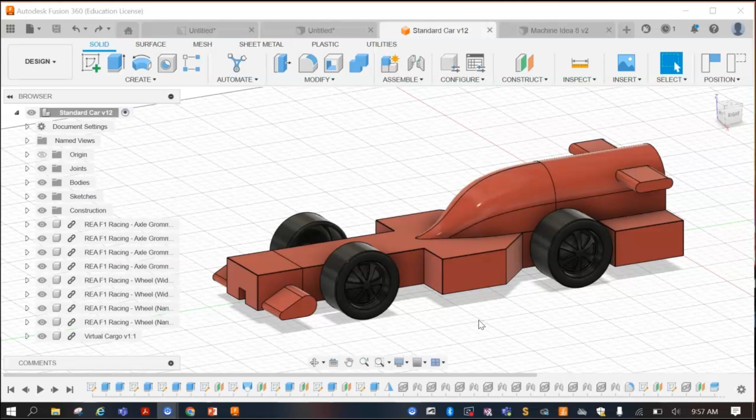So over here in the inspect area, I'm going to click on here. Alright, and you've got all these different tools that you can use. We've already looked at a couple of them, but there are a couple here that I think could be useful for looking at the shape of your model and analyzing that.

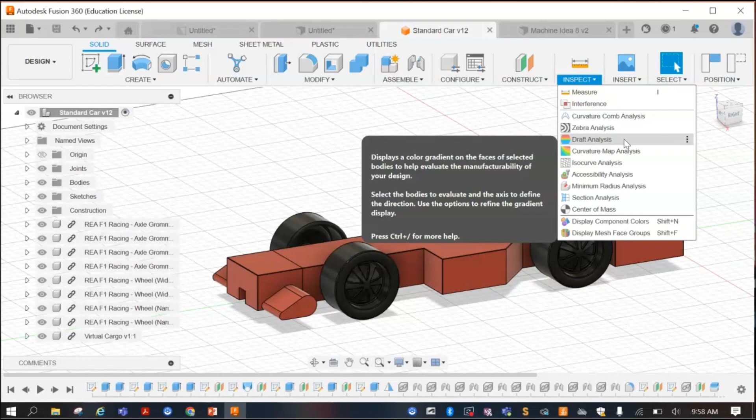So the first one we'll look at is the curvature map analysis. When you hover over these, it gives you a brief overview of what that does. For this one, it's analyzing areas of high and low surface curvature.

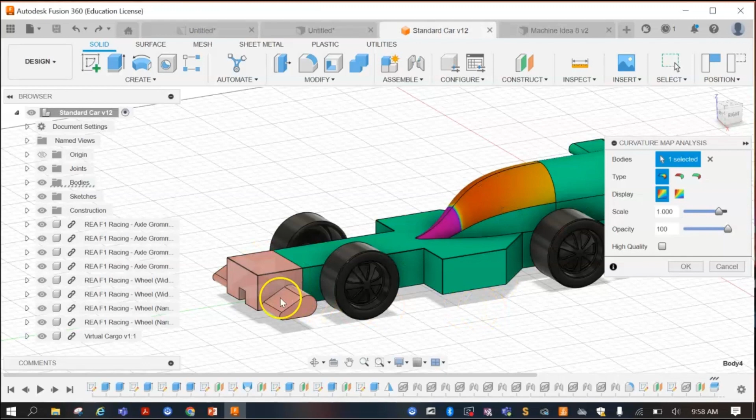So when we click on this, and click on the body, I'll click on the front as well. Okay, so now it's telling us where it's purple, that's where there's high curvature. You can obviously tell in that section there.

Now, as we know with an F1 car, when we're looking at aerodynamics, the steeper the curve, the more drag you're going to have, and this here will probably cause you a bit of downforce.

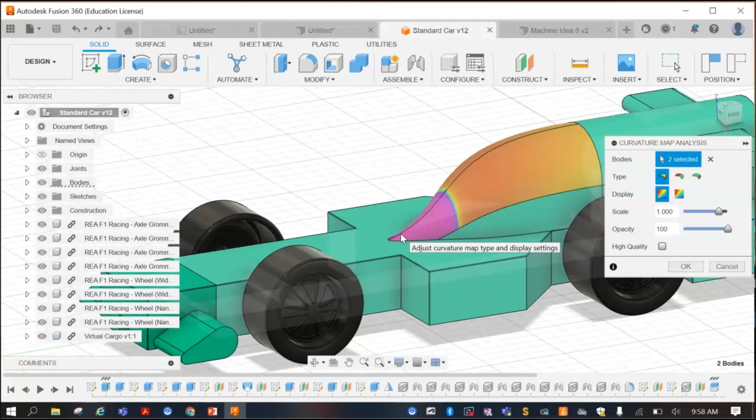Okay, so you probably want to use this tool and work out, well, maybe that curve is a bit too steep, maybe we can look at changing it. So yeah, I think it could be useful for those kinds of things. Alright, I'm just going to press OK. And then if I go to my other model...

Alright, so this is what we were working on before. I'll do the same thing here. So, inspect, and we'll go to this one, click on the body.

Alright, so when you've got more intricate curves and stuff like this, it's going to be more useful for you. So you can now see that the ones in purple obviously have the high amounts of curvature. For aerodynamics, it's probably good to have a look at these kinds of things, especially when you're doing these sort of intricate shapes, as you can see here.

Okay, now, yeah, it really depends on what you want to use it for.

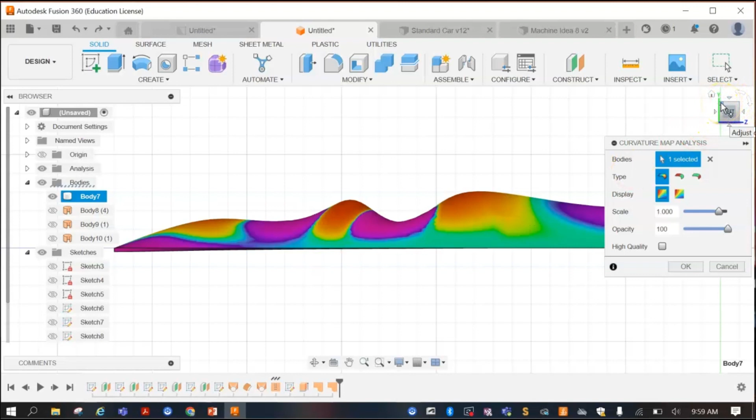I would be taking screenshots of this and doing like a before and after analysis of it, and go, okay, well, we identified that this steep curvature in here could be a little bit flatter to reduce turbulent flow in this section here, and to reduce downforce and whatever.

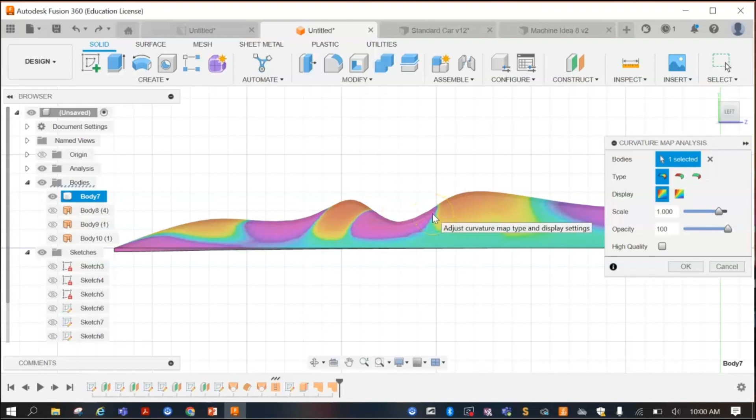So you could show, here's a screenshot from maybe this sort of angle, and then you can show another screenshot and show how you've improved that. So I do see some value in this tool, but if we just go cancel for now...

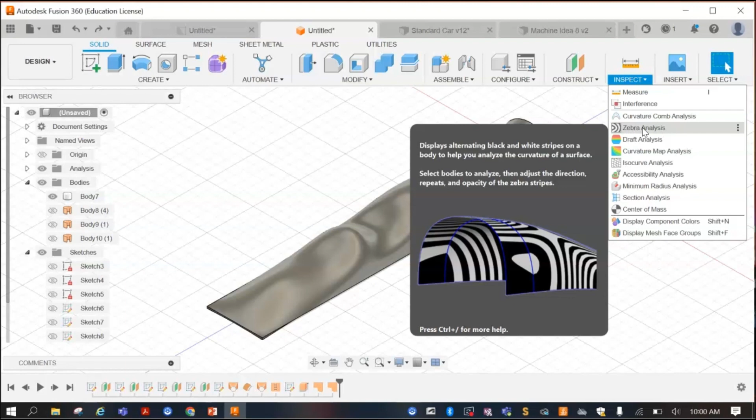Alright, another tool that we can look at is the zebra analysis. So it says here, let's go back, it displays alternating black and white stripes on a body to help you analyze the curvature of a surface. So it's doing something relatively similar.

Okay, but you can see obviously where I've got those little bumps, you can see those lines change. So when I move around, you can sort of see, especially from like a top view as well, how that changes.

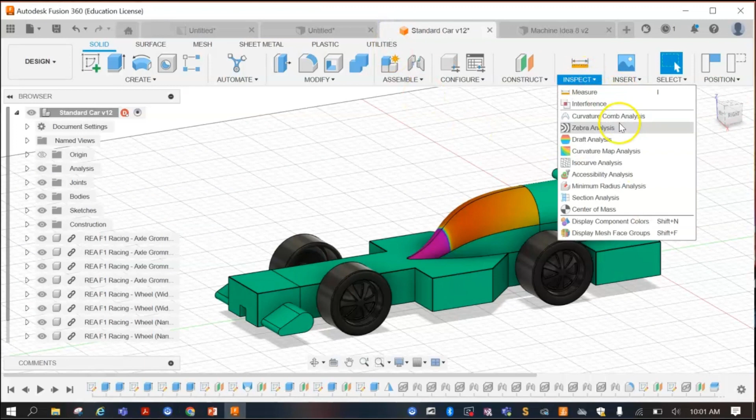Now, when you look at your standard car body like this, and we'll do the same, press OK, you can start to see where some of those different surfaces sort of meet.

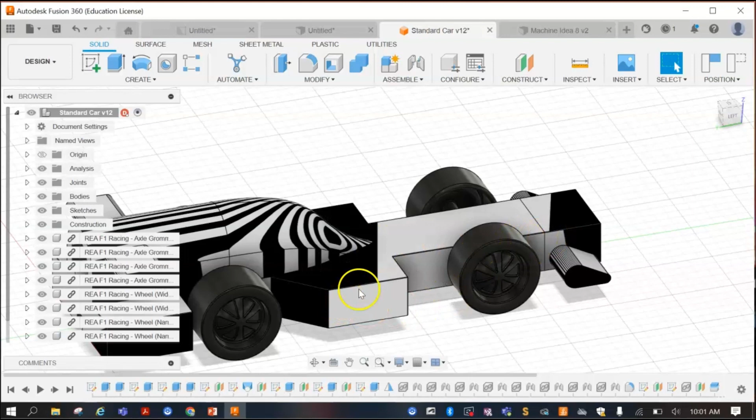Okay, so for example, the nose cone is completely different to just a standard body here. So if you wanted this to be a more continuous sort of shape, obviously doing it the way that we've done it, just with simple extrusions, probably isn't your best bet. You probably want to go and do similar to what we did here, where you've got continuous faces all the way around your car body. Because aerodynamically it's going to be a lot smoother since all these edges are molded into each other, not just random blocks hanging off the side of your car.

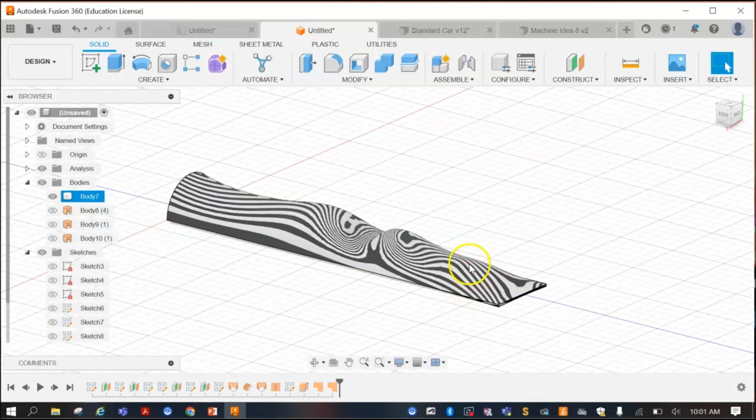So you could use the zebra analysis to go ahead and look at certain parts of your car. So there's those options. I just cut the video, and what I've done is I've just restored my car back to its normal state. I just went undo a couple of times to get it back to there.

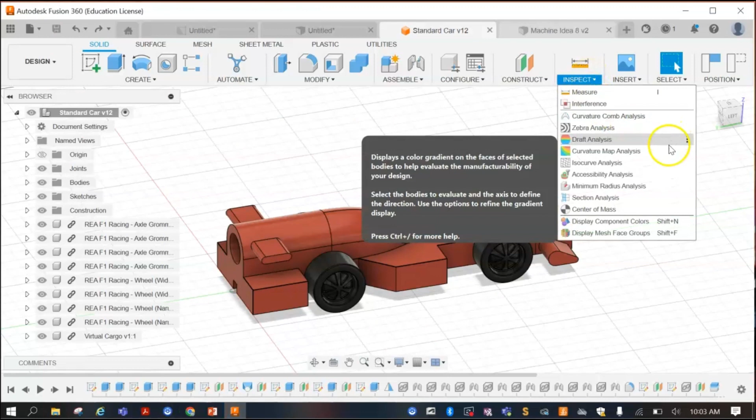But what I was going to show you is in inspect here. The other ones I'd probably be interested in would be the accessibility analysis. Especially for machining, you can start to work out what areas you can actually access. So that could come in handy.

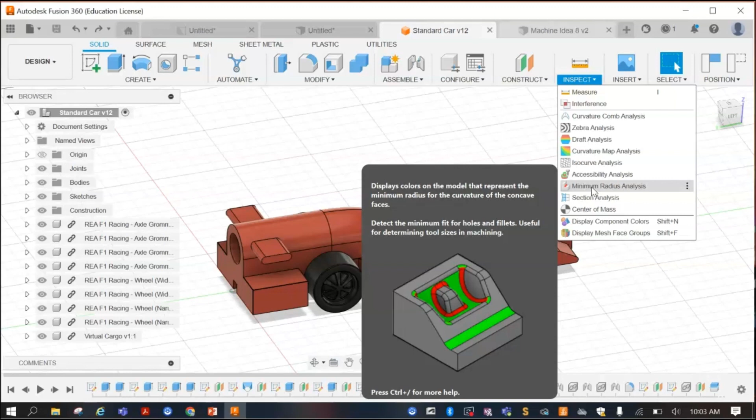But then also this one here, the minimum radius analysis. We know that we need to have at least a 3 mil radius because we're going to be using a 6 mil ball nose cutter. So you could go through and use something like this. Select your model, and say the minimum radius that you're going to need would be 3 mil. Then you can start to work out where we need to fix up some parts of our car. So stuff like that could come in handy.

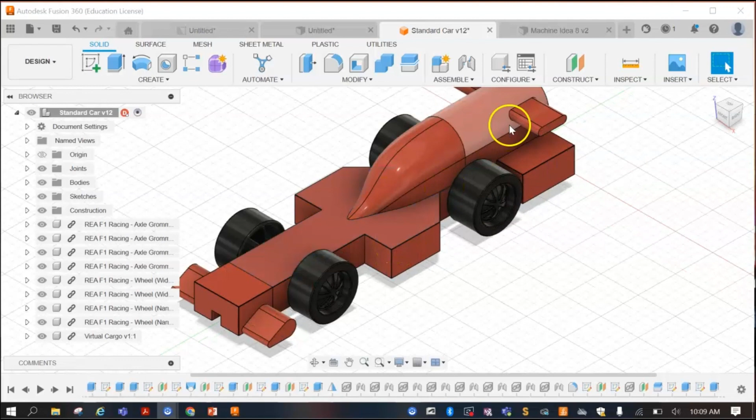So I just want to show you an example of what the minimum radius analysis actually looks like. Let's say for example on this surface here, for some reason, you wanted a 1 mil hole. I'll finish that sketch and I'll just extrude that, so let's say I want to extrude a little hole in there like that.

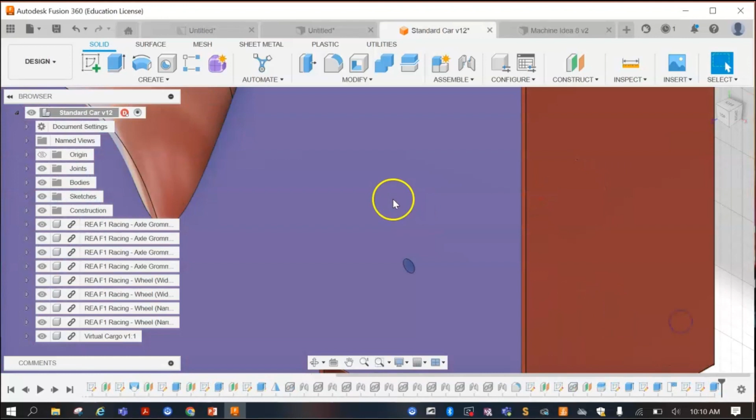So what this analysis will do is it will show us that if we want a minimum of at least 3 millimeters, it will show us if there's any issues with the car that you'll need to fix before you put it in the machine.

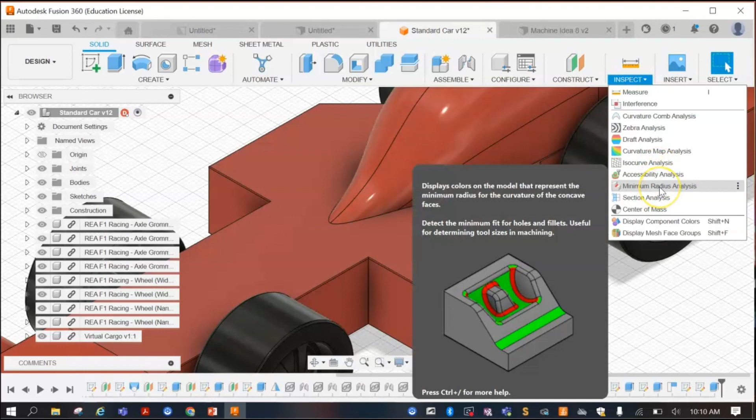So for example, if I go now to inspect, minimum radius analysis, and click on the car body, and the minimum has to be 3, then obviously now you can see that radius there is going to be less than 3, so it's not at my minimum, and it's highlighted in red.

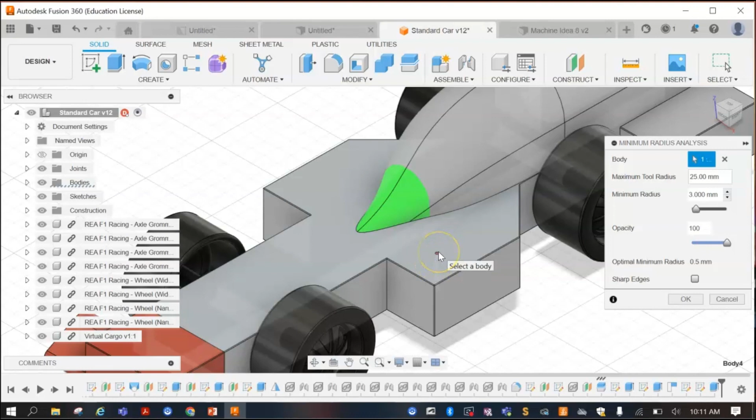So if you went around and did certain designs and then thought, yep, this is going to be exactly what I need for the machine, but then you came ahead and did this analysis, you would be able to work out if there's potential issues with your car as well. So it'd actually be a good idea to do this, and maybe just highlight the areas where it's red, that you can't do, and then go ahead and try and get those fixed up before you go through the whole manufacturing process.